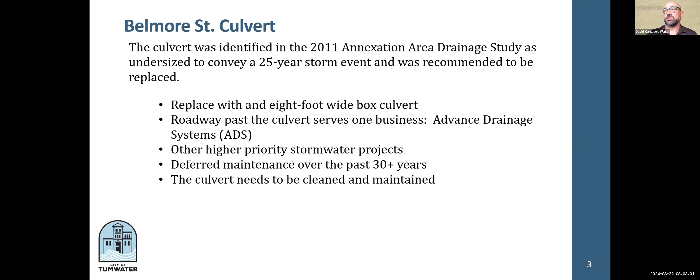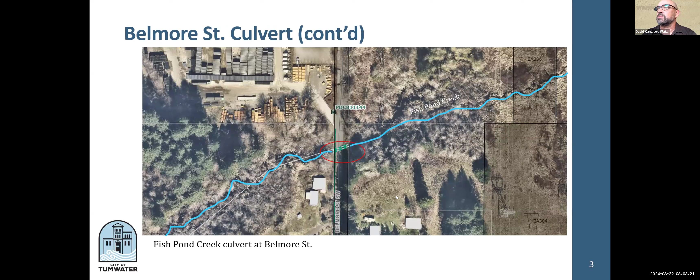This is a photo of the culvert. Here to the north is the area that is ADS or Hancor, and we've got a few residential houses to the south of that. This is the property in question, Jason Herrera's property, and you can see Fish Pond Creek bisects his property.

There are a series of beaver dams on the property that have impacted water flow downstream. Our plan is to work with Jason Herrera to install a flexible leveler on his property at the beaver dam nearest the culvert, which would help maintain water levels at a consistent level so maintenance on the culvert can take place.

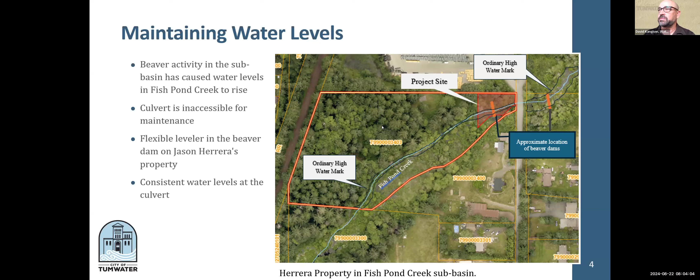We have been in consultation with several of our partners with this project. We just got the DFW HPA permit this week, so that's good to go. We've been in consultation with U.S. Fish and Wildlife Service, as well as Beavers Northwest on this property, and everybody is on the same page. We actually have another meeting coming up right after this one to discuss the finer details of this project.

We have a fairly good success rate with these types of public-private partnership projects, where we have beaver mitigation devices on private property. We've got several projects we can point to for success: the Linwood Avenue property owned by Linton Wildrick, the Pioneer Street property, the Palermo Wetland, and 66th Avenue, which is very near this property. All have been really successful in maintaining water levels and allowing private property owners to have a stake in these projects.

So in conclusion, the right of entry agreement with Jason Herrera is pretty important for this project to take place. I'm asking for a signature from the mayor and Public Works Committee to recommend the approval of the signature. Any questions? No questions here. I don't have any questions either.

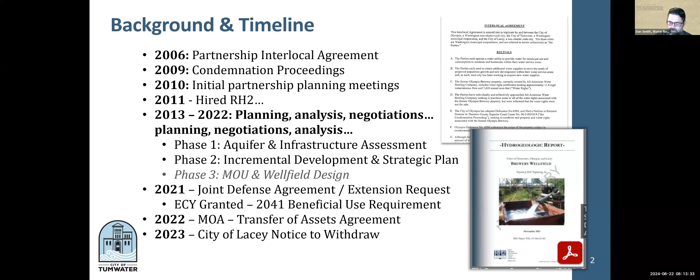The following year, the City of Lacey submitted to the partnership notice to withdraw from the partnership and transfer its assets to one of the other partners. Through that process, the City of Tumwater agreed, and the City of Olympia did not object. Over the last year, we've been working with the City of Lacey to determine the value of the water rights.

The first part involved a valuation of the property and the water rights. We tried to follow the process that was used during the original acquisition of these water rights back in the early 2000s. We had West Water provide a valuation of the water rights themselves, at 761 acre feet, 2,171 gallons per minute, representing Lacey's one-third of their assets. That's about enough to serve approximately 3,200 homes.

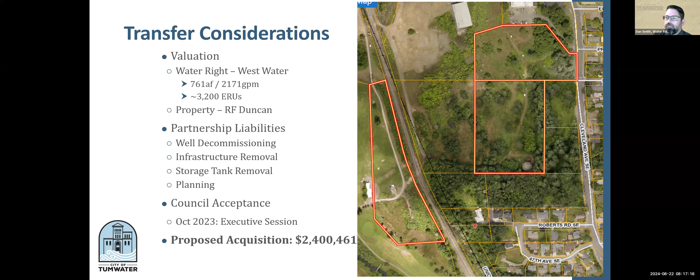Back in October of last year, we came to the city council for an executive session where we discussed this project and determined the boundaries of the negotiation. I'm here to offer a recommended proposed acquisition cost of $2,400,461, encompassing all of the assets and all of the liabilities to acquire the City of Lacey's portion.

So this is all predicated upon the valuation being accepted. These were the conditions outlined in the memorandum of agreement with the cities relating to how assets would transfer to one property or one partner or another. Once this agreement is accepted, there is a request for a right to use in perpetuity certificate, which recognizes that one city cannot rely upon water that is not provided to them in perpetuity. We can't lease water rights and provide for development based on that lease. They have to be owned.

So Dan, I have a question. Since Lacey chose to disengage, what is the significance of their withdrawal? Do we not share water with them and just with Olympia?

Correct. So that is what this partnership means. If they're withdrawing from the partnership, they are relinquishing their one-third share of the water. The memorandum of agreement we agreed to in 2022 stipulated how that would happen and what were the conditions of that transfer. So in this case, if the presumption is that Lacey City Council will move forward with the agreement as well, that means they will be transferring all of their assets to us—the water rights, the infrastructure, and all of the liabilities we were just talking about—to the city of Tumwater.

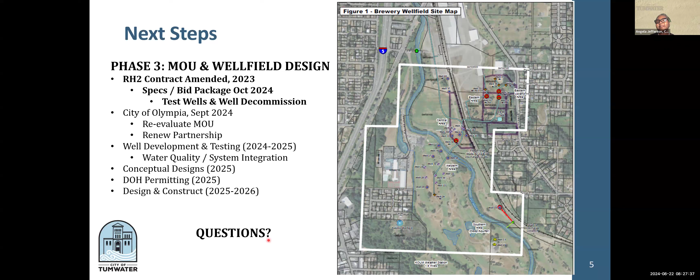No additional questions here. I'd like to make the motion if Dan is complete. Our requested action is to recommend City Council authorize the mayor to sign the brewery asset transfer agreement with the city of Lacey to permanently acquire Lacey's Brewery Wellfield assets, including all the water rights, infrastructure, and the associated liabilities of the Brewery Wellfield.

Thanks, Dan. With that, I move that we place the brewery asset transfer agreement with the city of Lacey on the September 3rd, 2024 City Council consent calendar with a recommendation to approve and authorize the mayor to sign.

Can I ask a quick question? I didn't have a question before, but now I have one that just came to mind before we vote. So Dan, with the approved valuation, is this the last time it'll appear before the council in terms of authorizing us to acquire the rights? Is this a vote to sign an agreement to agree to the transfer, or is it also a vote to pay $2.4 million for that purpose?

Because if it's the latter, I feel like it should probably be on consideration instead of consent, since that's a significant huge amount. Yeah, I agree. So the agreement accomplishes both: it modifies the partnership, it acquires the assets for the city, and within 90 days of execution of the agreement we would submit payment to the city of Lacey for those.

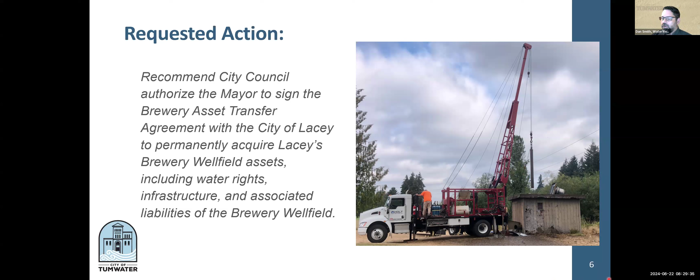Dan, would you be okay if we put it on consideration instead of consent? I fully expected that it would be. Yes, however, if that is going to be the case, I'm sorry I don't have a calendar here in front of me. I'm going to stop sharing if that's okay.

Yeah, sure, there we go. I will be out of town on September 3rd, so I would ask that it be put on the September 17th consideration calendar. If we need to move forward more quickly than that, Dan, I can help out with the presentation, but I'm happy to defer to that second meeting in September.

I think the timeline does allow for us. I know the city of Lacey is also hearing this at around the same time, and we both anticipate by the end of September it would be heard by both councils, and so that works just as well. September 17th doesn't put a wrench in the works. No, not that I'm aware of.

I will confirm with the city of Lacey, but I would anticipate that would be fine, and so we can leave it at that. If something needs to change, I can work with the council member or city administrator Parks to update that date if needed. Okay, that sounds good.

So Angela, is it okay, do you accept a friendly amendment to your motion to place it on the September 17th consideration calendar? That would be the change, yes. Well, I will second the motion. All those in favor, please signify by saying aye. Aye. Those opposed? Motion passes unanimously.

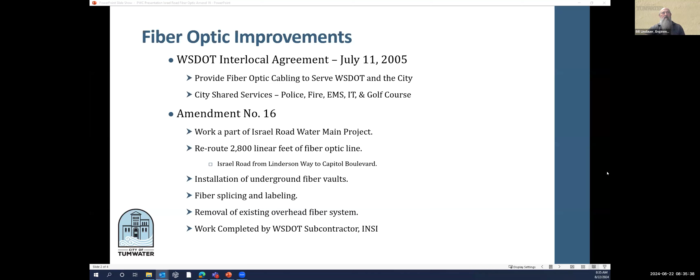The work was completed by WSDOT. Under their contract, they have a subcontractor, INSI, which is an approved fiber optic contractor. They contract the work, complete it for us, and then bill us through the actual fiber optics contract for the work completed. Amendment number 16 is a cost of $34,621.91, and it's funded through the fiber fund here at the city.

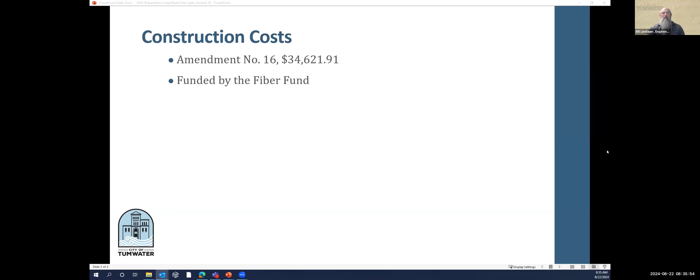So that was a pretty quick one. I don't know if anybody has any questions. I have a quick question: is the fiber fund just a name for any other account? Is it funded by our general fund and operating budget, or are the funds derived from revenues we extract from cable agreements or other things like that? How do we actually fund the fiber fund?

I'm not exactly sure how that's actually funded completely. I tried to look into that. I don't know if Brandon can touch on that. The fiber network was mostly set up actually by private entities, private telecommunications coming in. When they put in their own facilities, we require them to install ductwork. And then also when DOT went through and worked on their network, we were able to hop on and get a couple strands on their network.

We haven't spent very much money getting the system up and running. The conduit that was put in for the city, we actually rent out to private entities who, rather than running their own conduit and having all those costs, rent it from us for a certain amount per foot. We update it annually, and that's how the fund is funded.

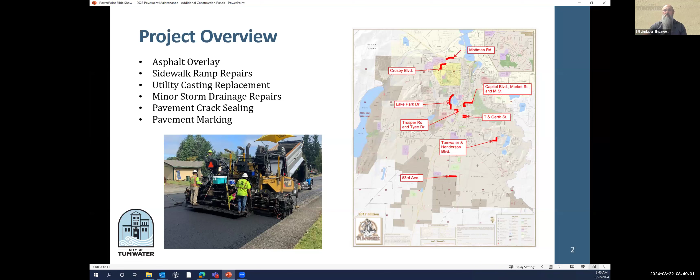So there was nothing outstanding on that particular item. We're asking for additional construction funds. I was going to start by going over the construction fund component and what we're asking for as far as costs, and then talk about the two items we're requesting additional money for.

The contract award was with Miles Construction for $3,857,857. The construction funds utilized during the course of the paver project were $4,171,958.32. That's the total amount we've spent so far.

The change order authority we were originally granted was 4.2 million. The request we're asking for now is 20%, which is 4.6 million. The extra items we're going to talk about today are two specific items we'd like to complete as part of this project.

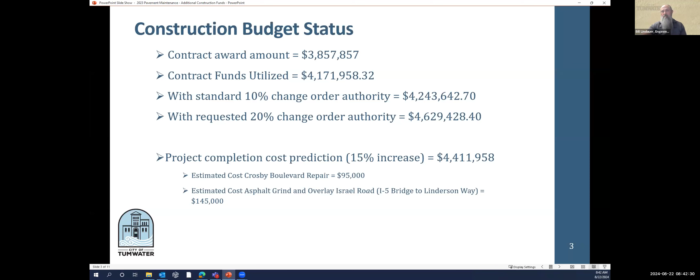The estimate for those additional costs runs around the 15% mark, so about 5 or 6% more than what has been spent to date on the project. I wanted to touch on the Crosby Boulevard repair first, which is estimated at about $95,000.

When we did the paver project last year, there was an overlay completed from the Barnes Road/Crosby intersection all the way down to Fortner. The area in question is from Somerset Hill to Fortner Drive, in the northbound travel lanes.

We completed the overlay, and a number of weeks later we started to notice the pavement was rutting. We were seeing some pretty significant ruts in the asphalt and other signs of settlement in the northbound lanes. We did some investigation at the site, cut into the pavement, took a look at what's going on, and realized we had water infiltration underneath the roadway.

Upon further investigation, we found two issues with the storm drainage system out there. The first was a clogged storm pipe downstream from a root ball. Some street trees had intercepted storm lines downstream, probably because it was more in the fall, when trees tend to grow roots pretty aggressively. That's usually when you get your plugs, your full plugs, and it plugged the pipes completely over that month or two.

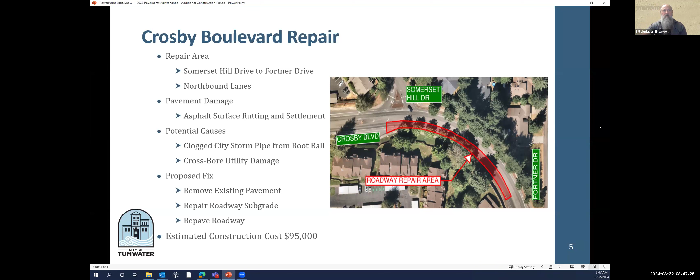The repair we need to do is remove the existing pavement, repair the road subgrade, and then repave that portion of the roadway. If we don't repair it, it will continually get worse. We did repair two of the worst locations last year as a side note, but it would be a good idea to repair the rest before the end of the year, before winter starts. The cost of that repair is about $95,000, and Miles would be doing that under the 2023 paver project at the same unit prices they had back then.

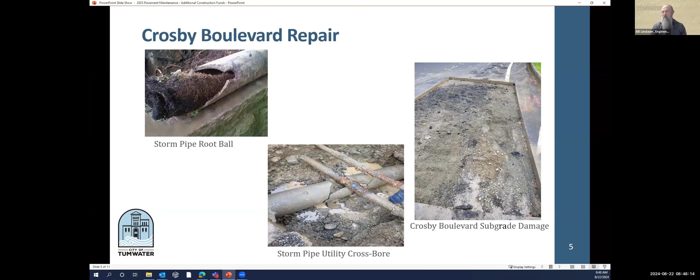Here's a quick picture. To the left is a root ball and what it looks like when it gets inside a pipe and basically clogs it up. The picture in the center is the storm pipe crossbore that was broken—you can see those pipes are pretty old, been there a long time, so that crossbore has probably been there 20 years plus, and it's gotten worse over time. To the right is a picture of part of the pavement we removed, and you can see the subgrade has rivulets inside it and a lot of surface water. That surface water is what's creating the rutting in the roadway.

So the second item is our request for additional funds to complete the Israel Road repair. The Israel Road repair component is the part of the roadway on Israel Road from the I-5 bridge to Linderson. This part of the road is not being repaired as part of the current Israel Road project we're working on right now.

This is out beyond those limits. If we don't repair this portion now, grind and overlay it, we'll end up doing it on the 2025 paver. We just think it makes more sense to complete it now for a number of reasons that I'll talk about.

That portion of the road has some pretty severe alligator cracking and rutting throughout. We did cut into it when we did the water project, but it has a number of old utility cuts all over that road too, so the road's starting to degrade at a higher rate.

We're hoping we can fix it before winter because then we can avoid maintenance costs with potholes and other things that happen during the winter months.

The fix for that road would be a full width asphalt grind and overlay, and then new pavement marking with some other minor things completed as part of the grind and overlay process. Estimated cost would be $145,000. Miles Construction is going to be using our 2023 bid prices for that project.

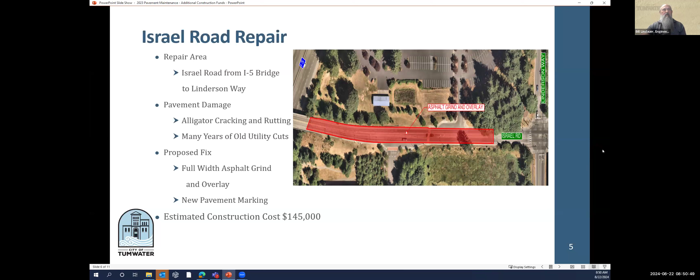So that whole segment will be completely repaired. The funding for this project is primarily the Transportation Benefit District, and then any transportation CFP funds that we might need, but primarily it's Transportation Benefit District.

So I'm sure you might have a few questions. Does anybody have any questions on what I've presented today?

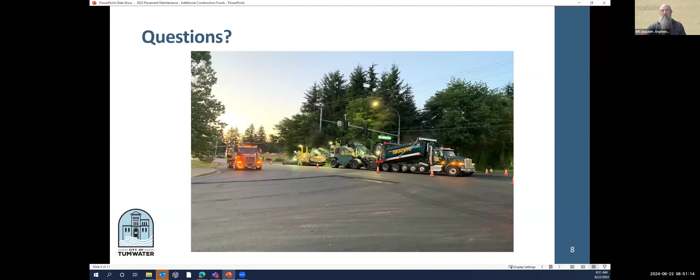So is it fair to characterize this as: it's not like we're authorizing 20% because of cost overruns. We're authorizing 20% so that we can add more projects onto the list. Is that a fair characterization?

I think definitely with the Israel Road component, that is, we're kind of adding that to the project because it makes sense and it's required, but it wasn't originally on the 2023 paver. The repair is just a function of an issue that arose that we really need to address.

Okay, I asked the same thing, Michael. This is an addition, and it makes sense to me, and it's not because of underestimation on our part. So yeah, it's just good looking out. If we can save the city money, it's just good oversight. So thanks, Bill.

Great, Angela, would you like to make a motion if there aren't any other questions? Affirmative. So I recommend the City Council approve and authorize an increase in the change order authority provided to the Transportation and Engineering Director under Tumwater Municipal Code 2.14.060 from 10% to 20% for the 2023 pavement maintenance project, to be placed on the September 3rd, 2024 City Council consent calendar. And I will second the motion.